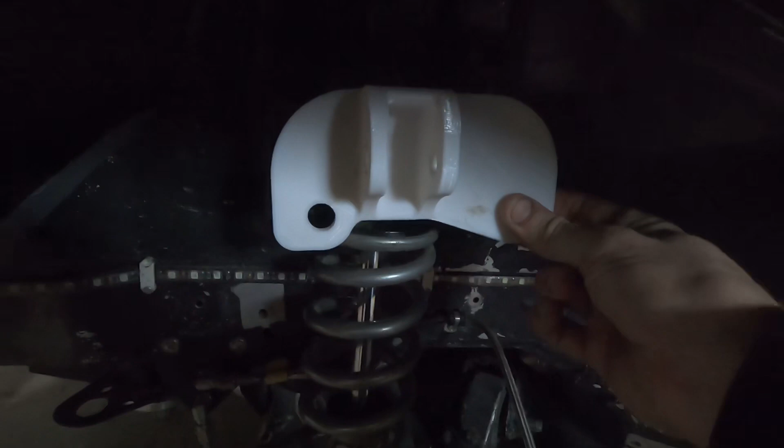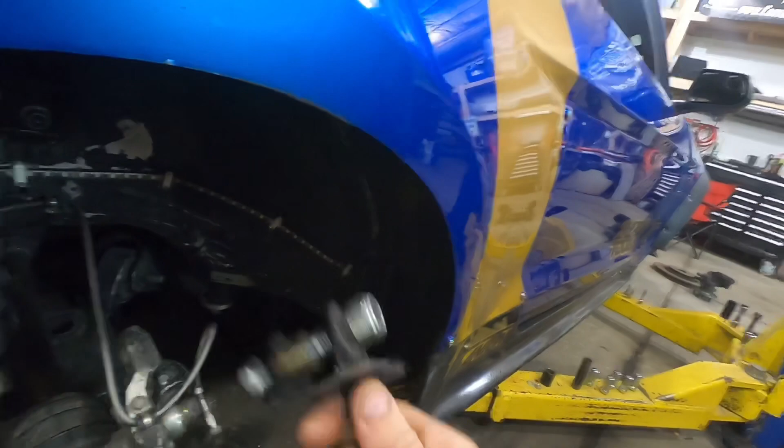Now, things I already got printed off. We went ahead and did our coilover conversion brackets there. So we have the lower one. This one just came off the printer yesterday. Haven't put it on yet, but that's going to replace the upper right there. And when I say replace, I do not mean that these are going to be staying in there. I mean that, for example, this kind of welded together deal will be replaced by a billet cut of that.

We just wanted to go ahead and 3D print it first to make sure everything fit, which it does. I do want to change one of the radiuses by maybe 1/8 of an inch, so it'll bring it in a little bit more, and then after that, that bracket's good. Still got to put this one on, test fit this, but from the look of it, it looks like it's going to fit good.

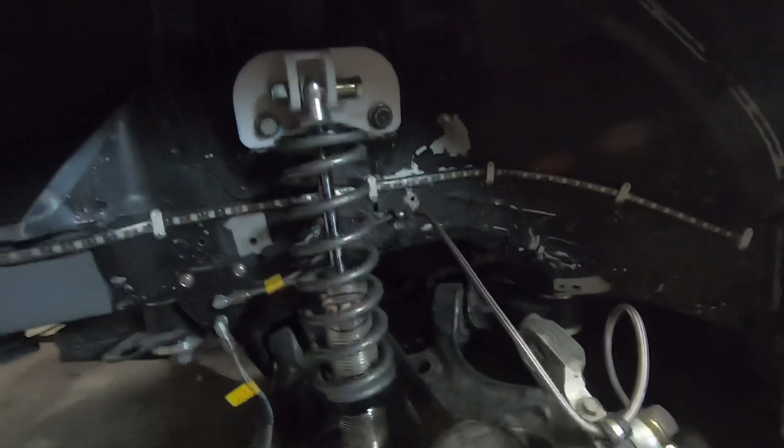And like that, with the magic of cutting my camera off and bolting something on, there we go. So you can see the difference between the old bracket, which is all that, and what the new bracket will be when it's nice and billet cut. So I think that looks a hell of a lot nicer, having the brackets like that.

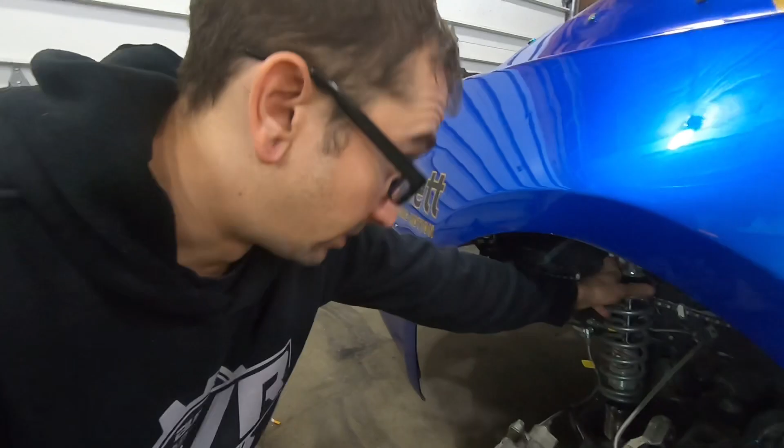And that's something that if I wanted to reproduce as a kit for people, it wouldn't be too expensive to actually make. Say I got 10 of those bracket kits cut, I could sell them for relatively cheap probably. And right now the cheapest rear coilover conversion kit for this car is $1,200 or $1,300, and that's for a non-adjustable shock. Now, a lot of guys that run track cars, drift cars, stuff like that, their cars are set up a specific way for a specific shock valving, whatever shock they want to run, whatever spring rate they want to run.

So what I would do is sell just the bracket kit, because it uses a universal style shock, an eyelet, 1-inch diameter, 1/2-inch hole bearing mount on both sides, which I haven't really seen any of the other kits offer. So it would allow you to buy the bracket kit and then run whatever shock and spring you want. So you buy the mount kit for $500 and then put whatever shocks and springs on it you want.

I could give you a ballpark of shock length to run, but depending on how you want your ride height to be, what spring rate you want to run, you could get the proper length shock and spring for your application, and you don't have to spend anywhere from $1,500 to $5,000 on a conversion kit. You can spend $500 on a bracket, and then go out and buy $100 corner shocks if you want, or you could spend $1,000 a corner on a shock if you really want to. But I think it'll just allow for more customization and the ability to fine-tune your vehicle the way you want it.

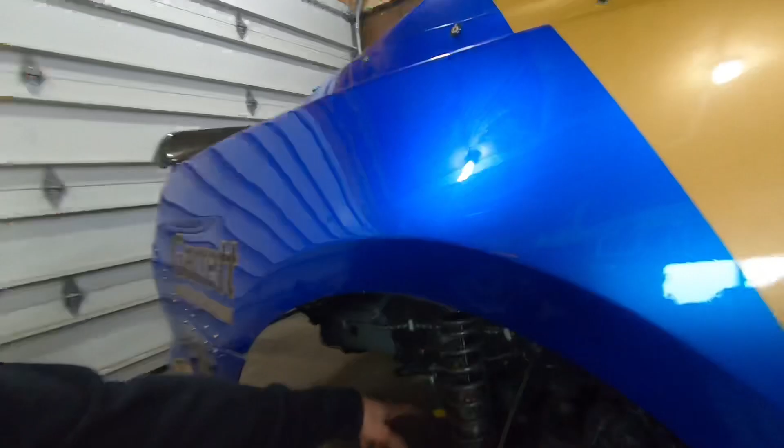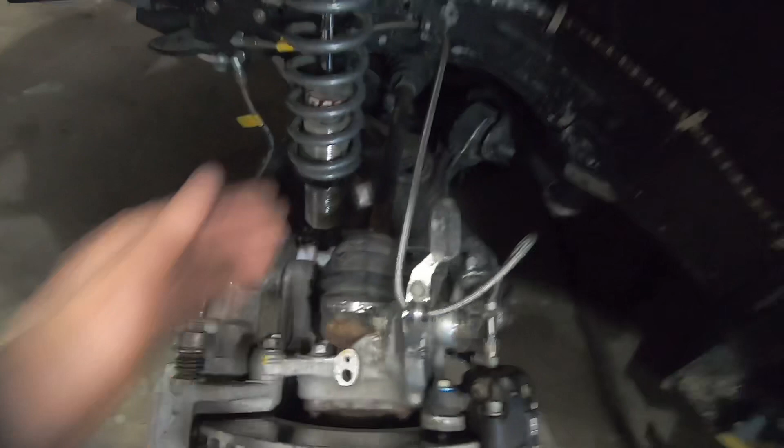Now, figuring out your spring rates and all that, the math's out there. It's not too hard to find and calculate it. You just got to know what your weight on your vehicle is, your wheel rates. You have to know your fulcrum points off of your suspension pickups to determine your spring rate. So say your spring's inboard here,

so originally the spring is further in, now we're moving the spring out, so your spring rate is going to be softer than what it was before in order to have basically the same effective rate on the spring, just because of the fulcrum, or I don't really know if it's a fulcrum, but the motion ratio change. And then you also have to take into consideration ride height for how far inboard that is off of where the wheel is.

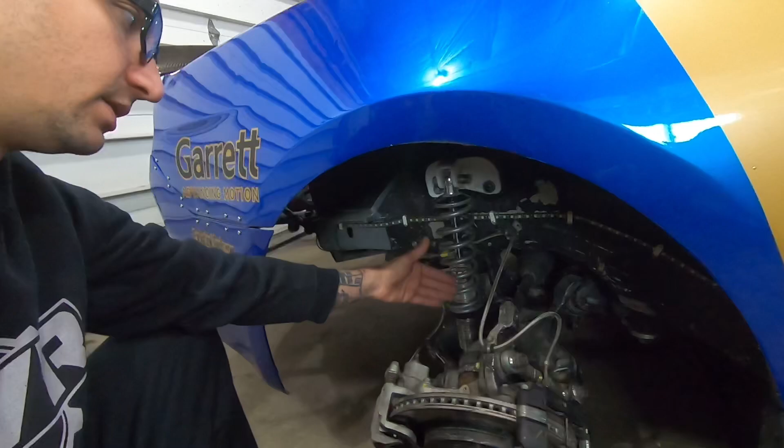So obviously these numbers aren't exact, I'm just ballparking, but if you have 3 inches of wheel travel here, depending on how far in your pickup is, that's going to translate to maybe 2 inches of travel here, or 1.5 inches.

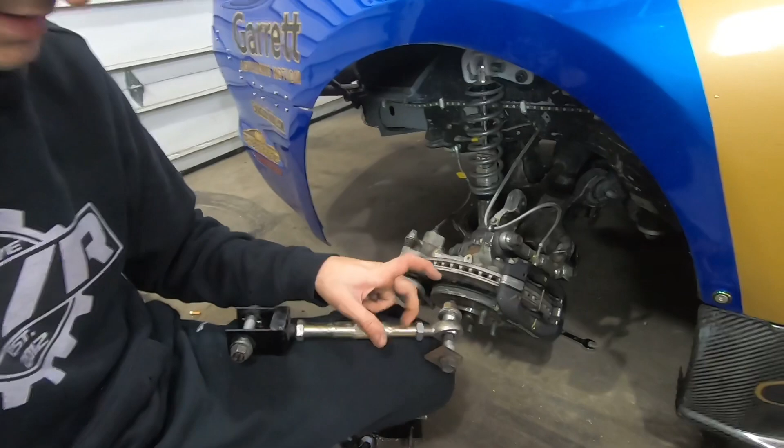I'm excited for everything we're doing right now in the off season and getting all these billet parts made and cut. The steering knuckle will be huge. I did start doing the camber arm, so I have the camber arm pretty much drawn out. I did design a rear billet toe arm that instead of using a sleeve in the center as a double adjuster, this is all one piece right here, and then it has a slit and a clamp style, and it uses a double adjuster sleeve in the end with a 3/4 heim joint. And I designed all new offset spacers so I don't have to use washers or any of that stuff.

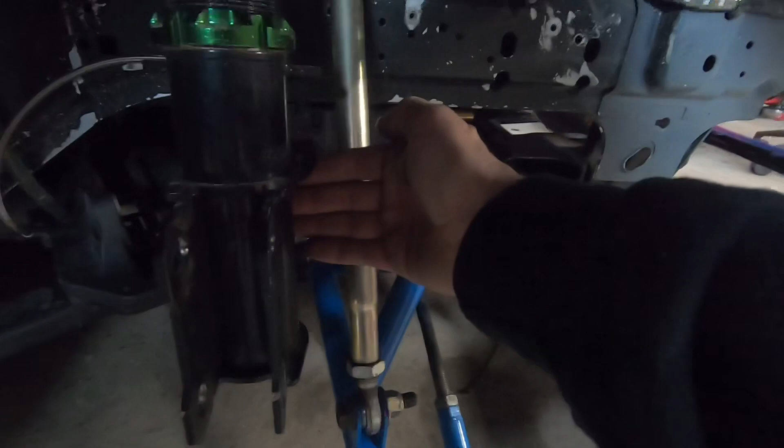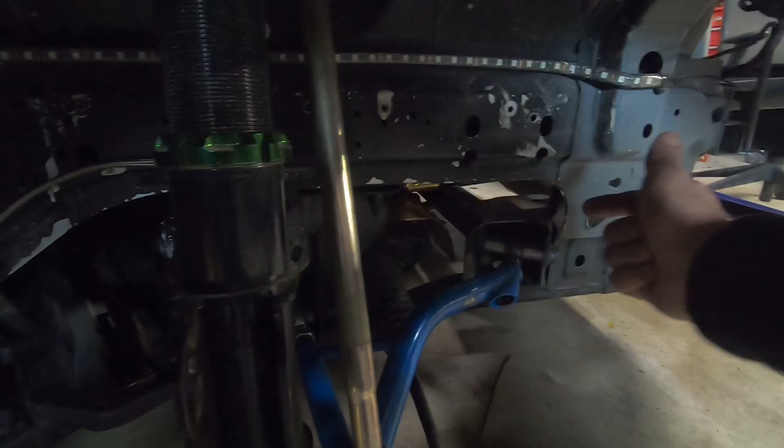And then I started putting the front control arms into CAD. So these arms right here, I did start drawing these into CAD. Those are a little bit more difficult to do just because there's a lot more angles. You have your straight plane off the subframe, but you can see how far out this arm comes. And then you have your other pickup angle, your input angle there, your clearance for the tire on the lock side there.

Now I have my sway bar pickup on my control arm right there because of my engine bay mounted sway bar, which surprisingly works really good on this car. I love that thing. That thing turned out perfect.

But this is one of the things that I have been considering putting into CAD. Now these arms do work really well, but if I can make them out of billet, I am going to consider doing that.

Now I've also been working on a couple other little things, little knick-knack stuff that I've been needing for the car. For example, a steering wheel hook. I know they're cheap, they're like 20 bucks for a wheel hook, but I keep forgetting to buy one, so I just spent 5 minutes and drew up a steering wheel hook, and I'm just gonna 3D print it out of ABS. It's not like anything structural, it just needs to hold the steering wheel when I'm in the pits. So yeah, I'm just gonna 3D print that.

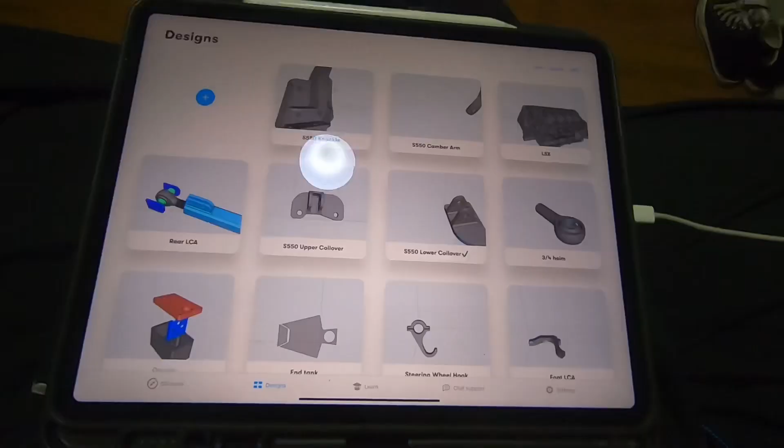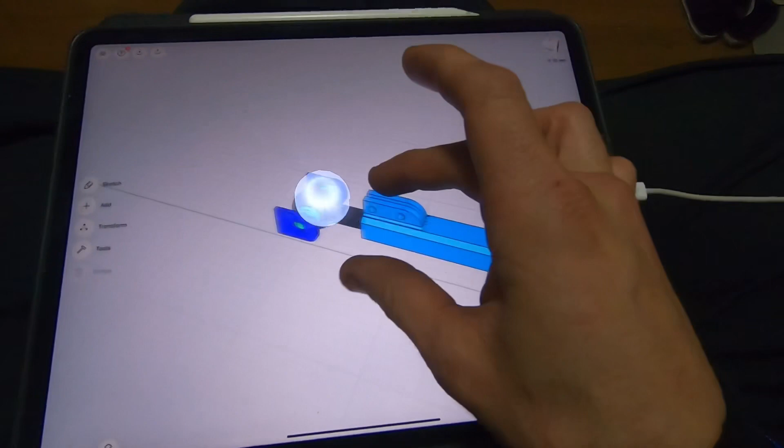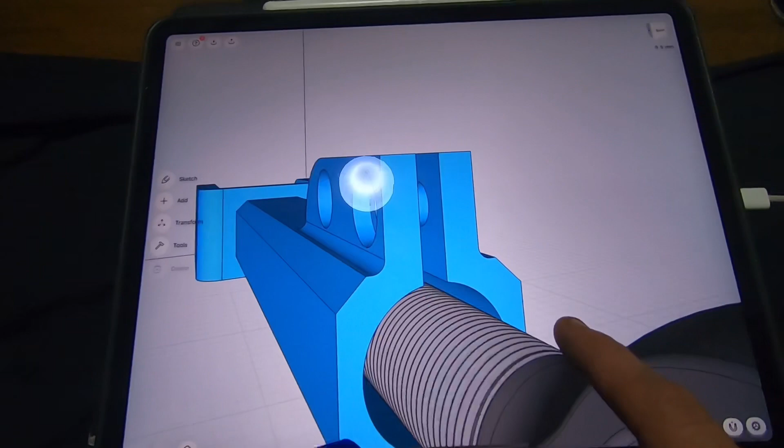This is the rear lower control arm design I was telling you guys about. So one single piece, and then it uses a clamp style with a double adjuster sleeve. And that's why you can see this heim joint that I have right here is a little bit smaller than that hole. So it'll use this little double adjuster right here with a left-hand thread heim joint, which is that.

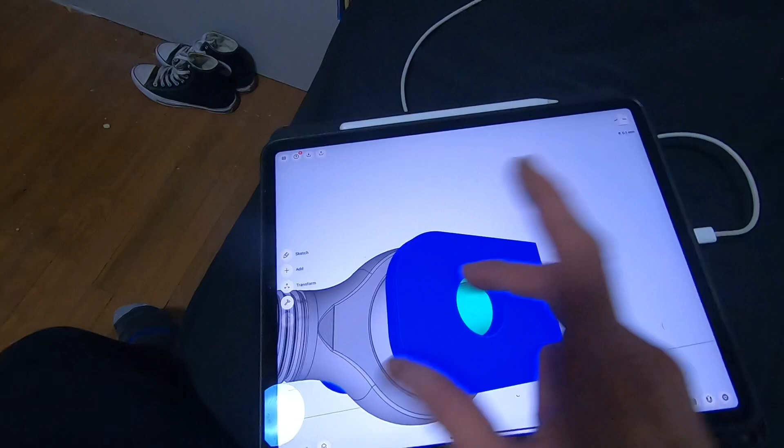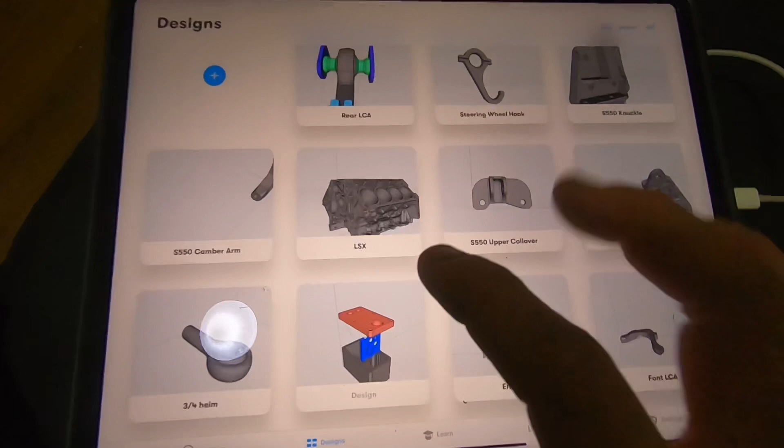We made new offset spacers for the subframe distance, and then these are little lockout tabs to cover up where the slots are in the subframe for the factory toe adjustment, and all the adjustment will be done in the heim joint. And then I showed you guys the steering knuckle already. I downloaded a CAD file for an LSX block in case I want to design brackets or anything like that.

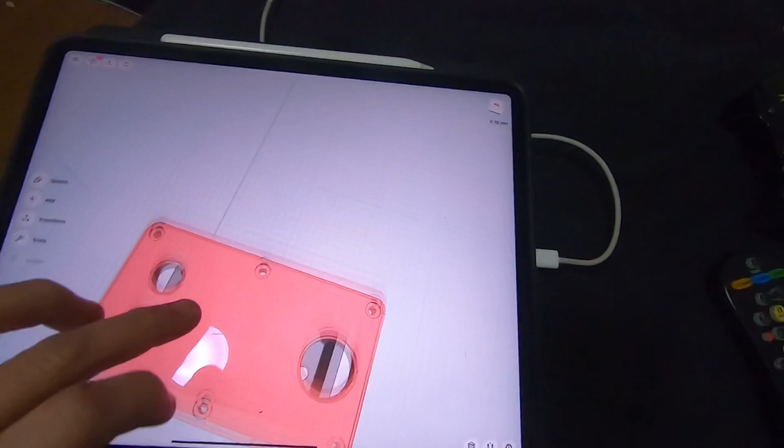There's a little catch tank that I've been messing with in some free time. Just thinking about making like a billet catch tank or something like that. This is me more just playing around and trying to learn the software a little bit more, because I did just teach myself CAD over the weekend, so I'm not an expert at it yet, so I've just been playing around with some stuff trying to learn it a little bit more.

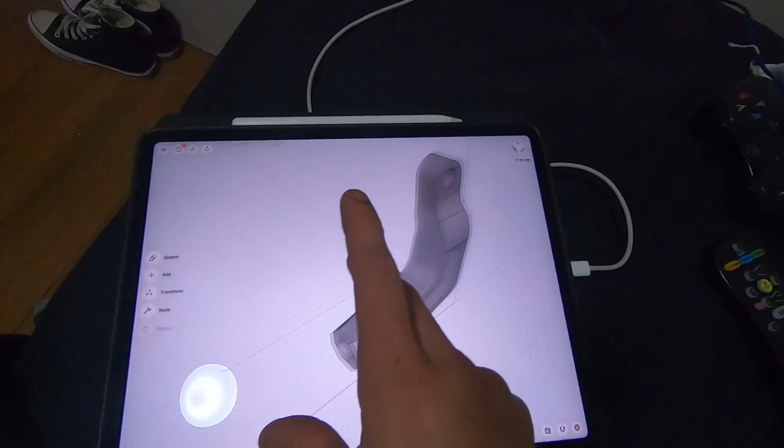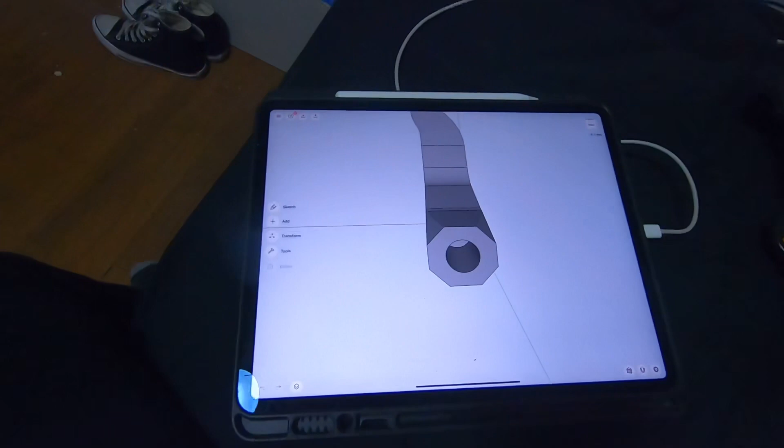And then we have our rear camber arm. So this is the rear camber arm design I'm working on here, to make it my own. It will use a spherical bearing instead of a bushing, because most of the aftermarket ones currently use bushings, so this will use a spherical bearing style mount. And same thing down here with a double adjuster sleeve out to the knuckle. That way all the camber adjustment can be done just by turning the adjuster sleeve.

Now I will probably need to put a jam nut on it for this one, because there's not really room to put a clamp style on there, but I think it's a good design, should work. Now a lot of this stuff that I'm drawing up here is all basically just for my own car. It's kind of loud out here because of that printer. I'm not trying to do it to make money off of or sell a bunch of these parts. It's more just for me, for designing my own parts and making everything myself.

But anyways, that's gonna be it for this one. Just want to keep you guys posted, show you what I'm doing. All the stuff I've been printing and prototyping and moving forward and taking that next step on everything I've been doing. So that's gonna be it for this one.